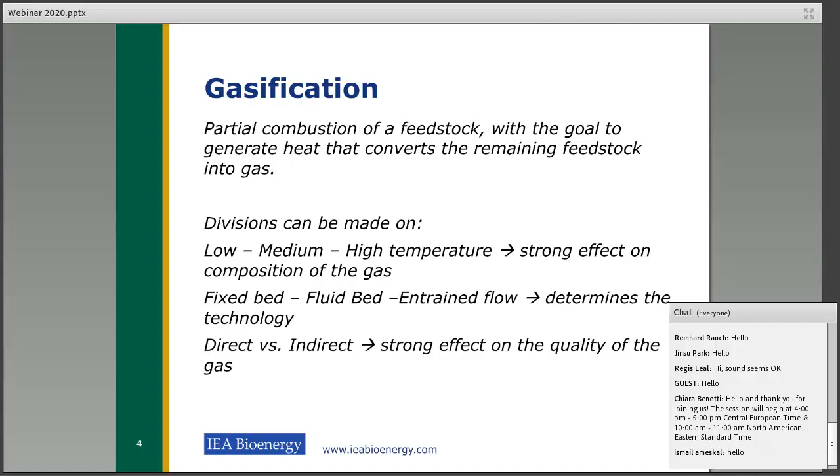And if you use air, it's further diluted from the nitrogen. An indirect gasifier has no dilution with this nitrogen or CO2, so you get a more rich gas, which has other applications. That will also become apparent, I hope, from the presentation.

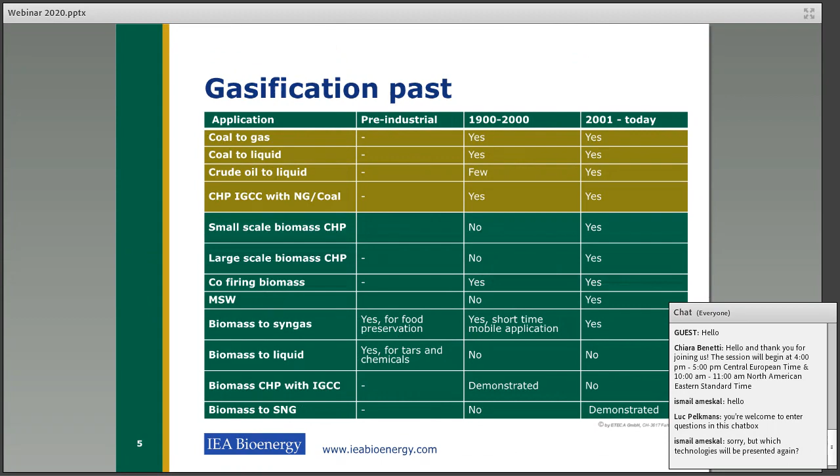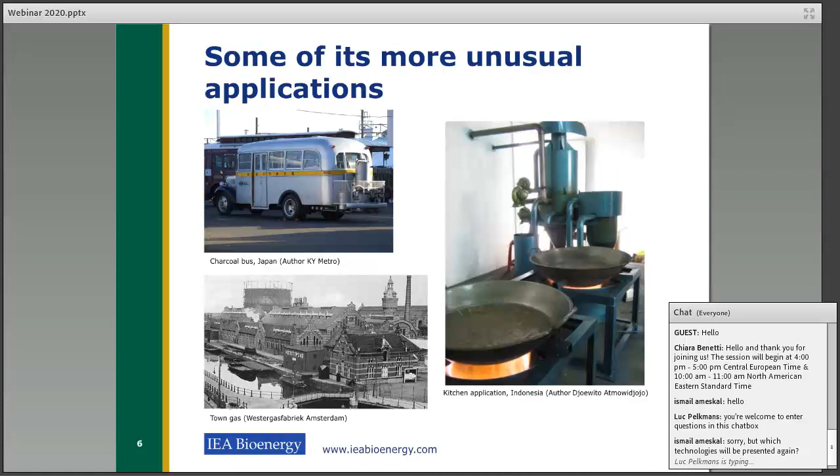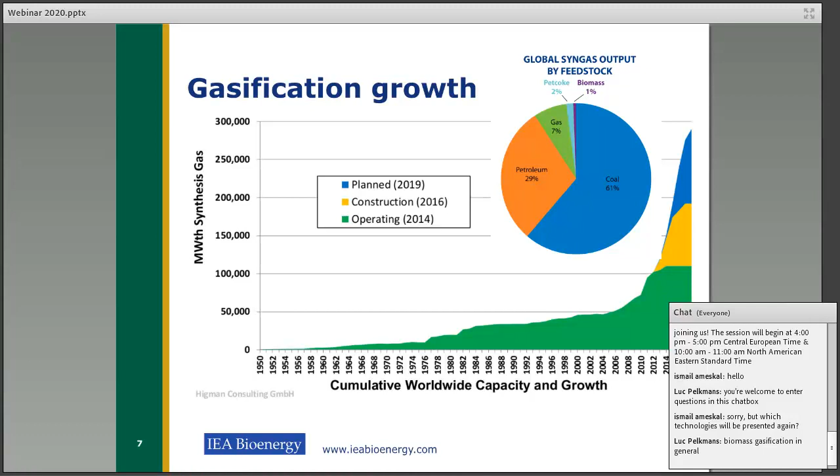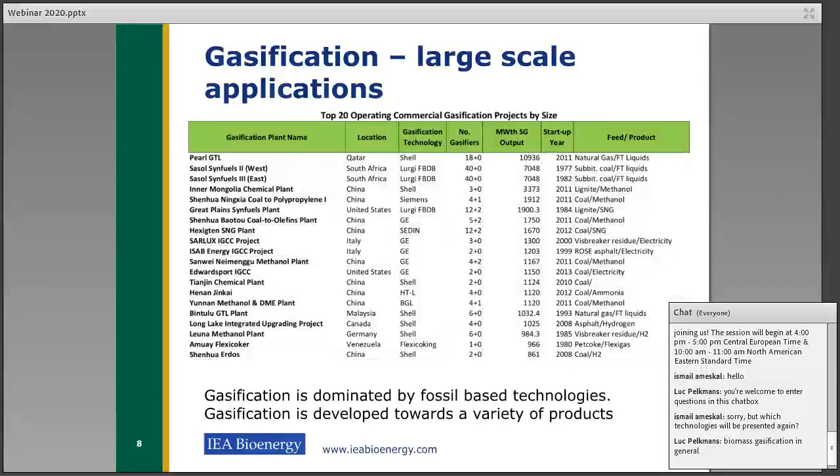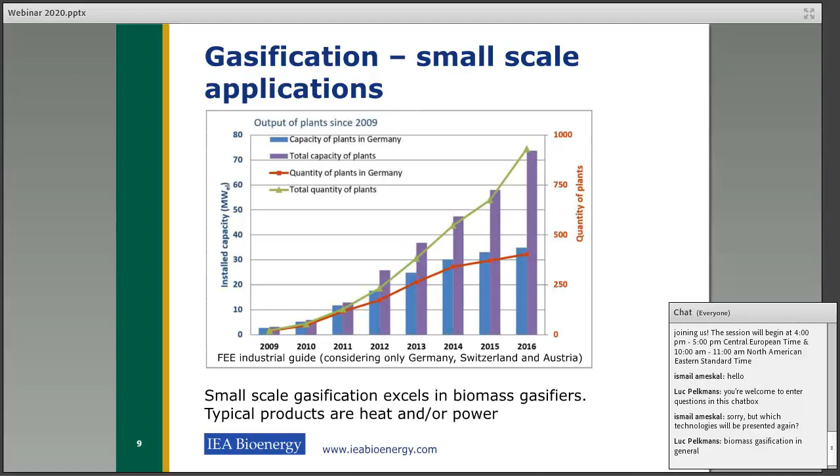Then if you go to more small-scale applications, the picture is completely different. The output or installed capacity is rather limited. This picture shows the installed capacity only in Germany, Switzerland, and Austria. But the interesting thing here is that the number of plants actually is quite large. You see close to 1,000 plants in total, and more than 400, I would say, in Germany. This is all small CHP applications, but it's all gasifiers that are in operation. So on a small scale, it's all proven and ready to go. It's also a good message to take home.

Then the following example is based on fossil fuel. I was reading on the Dakota Gas website about the history, and I found it very interesting. I think we can learn a lot about how things went there. In 1972, the decision was made to build this large coal gasification flagship, coal to SNG, substitute or synthetic natural gas. But it still took 8 years before they finally started construction. In the meantime, there were several occasions where the plant nearly got shut down, or the project never started, because of inflation, legislation, politics, governments that changed, offtake contracts that were not in place or not the right prices, falling energy prices, emission limits. So there's many things that can make or break a project, but eventually they started in 1980, and in 1984 they got online for the first time.

But still in 1985 they nearly had to abandon the project again because they were not making money, and the forecast was that they would lose a lot of money before they actually started making money, and then the DOE took ownership. In 1988, Basin Electric obtained the ownership for this plant, and they formed the Dakota Gasification Company. So that's 16 years later, where you actually have a company that is still running this plant today. But that's how much time it takes before it can be called a success.

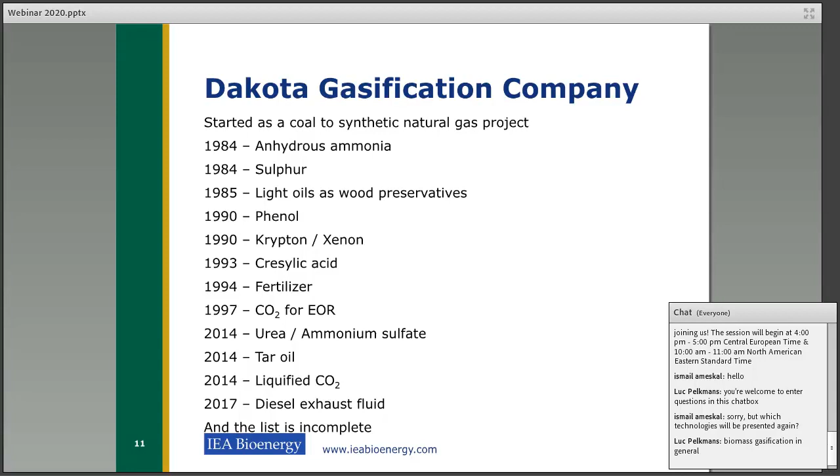Then if you look into what they were set out to make, the synthetic natural gas, to become independent from external energy suppliers. In 1984, they started up the plant, and they also started producing anhydrous ammonia and sulfur. You can see the list over the years - they added different products like light oils and phenol, krypton, xenon, and cresylic acid, fertilizer, until 2017, just 3 years ago, diesel exhaust fuel fluid as a product from this plant, in order to improve the business case. So it's interesting to see that a plant that started as a gasification plant for SNG production over the years develops more or less into a big refinery plant.

So what can we learn from this is that, well, gasification has been around for centuries. I think it's not a new technology in that sense. And it also has been successfully applied for different feedstocks, and also to produce different kinds of products. Some were temporary because of, well, wartime, but some of them are still out there today. And the early applications, I found that even more interesting, were actually high-value products. The chemicals and the food preservatives today would be a high-end product.

It's also good to notice that the percentage of installed capacity for biomass gasification is small compared to fossil. That's not a big surprise, but the number is quite large. Only for the 3 countries mentioned, it's close to 1,000, and then there's even more in India and China. So the numbers are quite large.

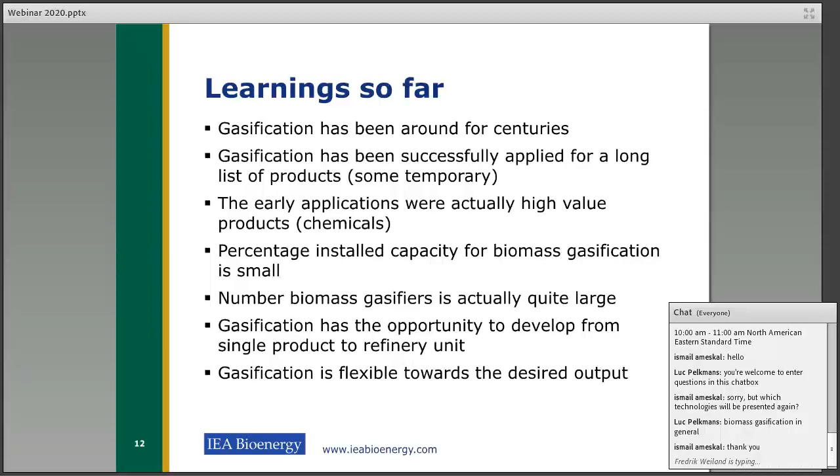Gasification also shows the opportunity to develop from one single product to more like a refinery approach. Maybe not for all gasification technologies, but at least for some technologies. And it's also flexible towards the desired output. So if you produce a gas containing energy in the form of CO and hydrogen, you can choose to go to a boiler or to an engine, but you can also try to develop projects towards biofuels or towards chemicals. So it's very diverse.

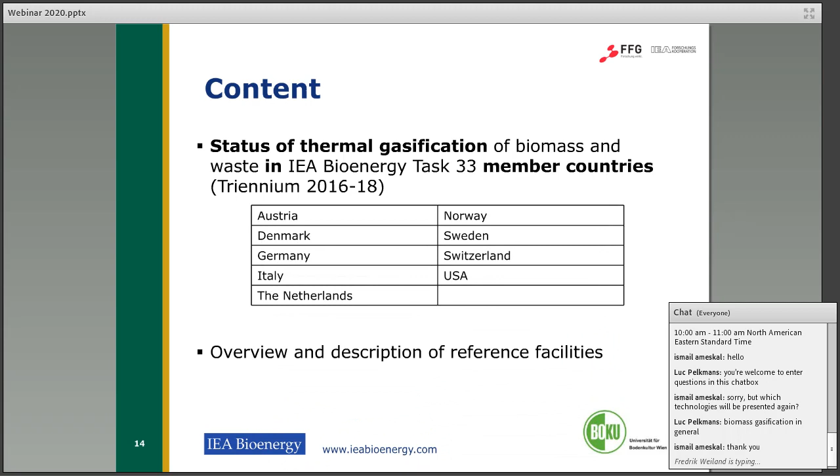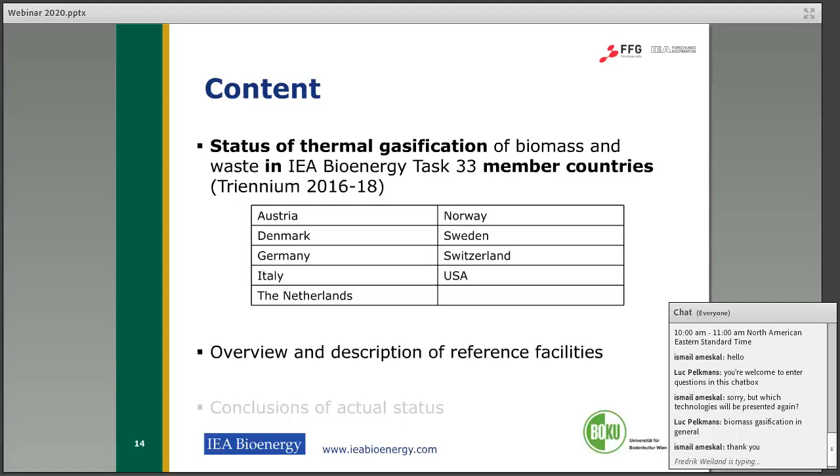The content of my presentation: at the beginning I would like to say some words about the status of thermal gasification. Then I would like to talk about the countries which were member countries of our task in the last triennium, followed by an overview and description of some reference facilities.

In Austria, at the moment, in comparison with the past, there is a boom of small-scale gasification facilities. We have 5 producers of small-scale facilities: Urbas, Syncraft, Glock, Ecoenergie, Hargassner, and Fröling. All these facilities are fixed bed. Syncraft alone produces floating fixed bed gasifiers and also focuses on biochar production.

Contrary to this boom in small-scale gasification, all large-scale facilities in Austria are now on hold. For example, Güssing: construction of this demonstration plant started already in July 2000, and it was in operation from November 2001 to October 2016. With this demonstration plant, the scale-up of fast internal circulating fluidized bed gasification process was realized for the first time. Therefore, the plant in Güssing can be seen as a reference plant for other facilities based on this technology.

These plants are in Germany, in Senden; in Sweden, in Göteborg; and in France. It is a Gaya project.

At that time, when Güssing was operational, due to favorable characteristics of the product gas, there were several research projects ongoing, using a slipstream. The focus of the projects was on production of Fischer-Tropsch diesel, production of SNG. It was also a topic for solid oxide fuel cells from the gas, and catalytic cracking of the tar.

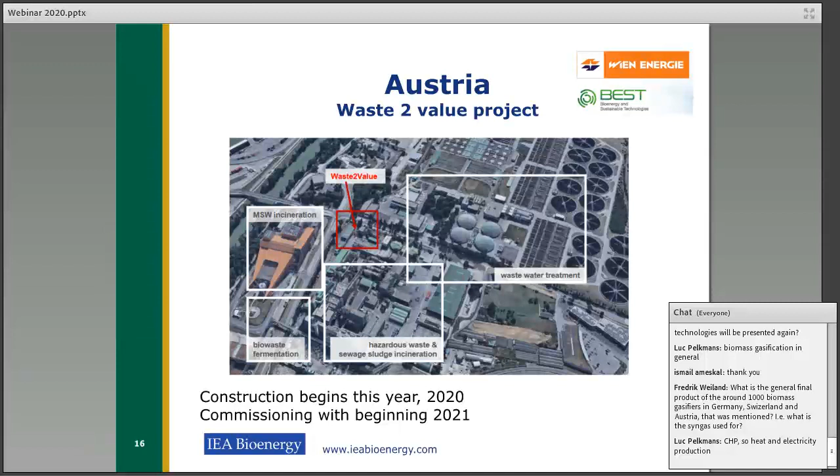It should be a 1 megawatt double fluidized bed gasifier with a 300 kilowatt Fischer-Tropsch synthesis pilot plant. It will be built near Vienna in Simmeringer Heide, and a research lab will also be included. Here the focus will be on mixed alcohols and hydrogen separation.

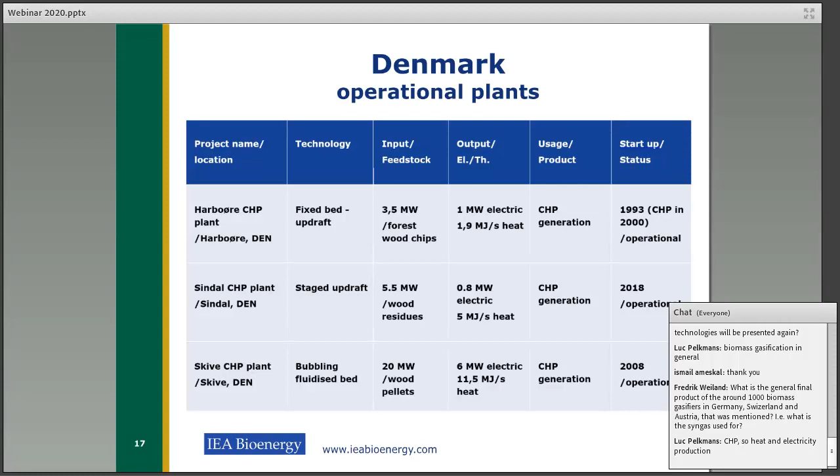The next country I would like to present today is Denmark. At the moment, there are 3 big plants in operation: one in Harboøre, one in Sindal, and one in Skive. All these facilities focus on combined heat and power production. The fixed bed is in Harboøre, the stage updraft is in Sindal, and the bubbling fluidized bed is in Skive.

I would like to say some words about the Skive plant. Commissioning started already in 2007 using just 1 gas engine, and operation began in summer 2008. After that, 3 further gas engines were installed.

As you can see in the picture, it is a bubbling fluidized gasifier with woody biomass input of 20 megawatts as feedstock. It has 3 engines now and produces more than 11 megawatts of heat. It produces district heating, and electricity is sold to the grid.

It should also be mentioned that public funding came from the Danish Energy Agency, the European Commission, and the US Department of Energy. After several years of intermittent operation, the plant has now reached high availability. Skive Fjernvarme, who is the owner of the plant, has been looking into the opportunity to utilize the gas not just for heat and power production, but also for the production of gasoline and other products.

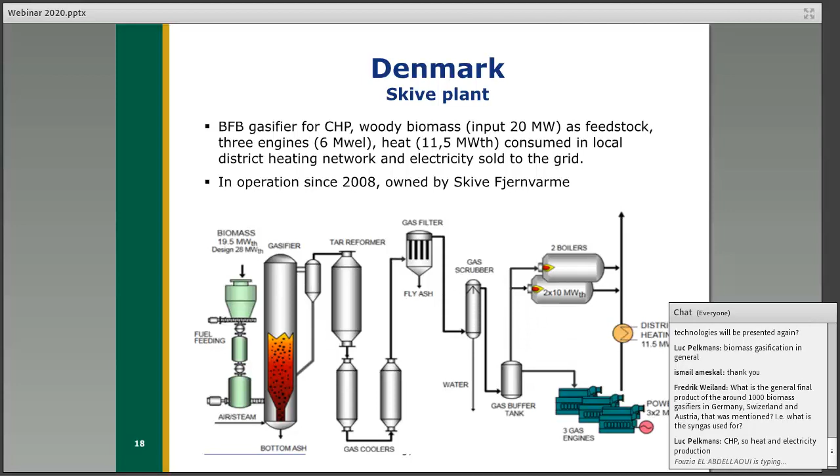The next slide is about 3 plants which are not already in operation: a Pyroneer plant, the Viking gasifier, and a plant in Hillerød. All 3 plants are now on hold or mothballed. The Pyroneer plant was a circulating fluidized bed gasifier with 6 megawatts thermal.

Commissioning was in 2011, and feedstock was straw and manure fibers. The gas was co-fired in a coal-fired unit, and it was planned to upscale up to 60 megawatts thermal, but this technology was not as successful as supposed, and it was not sold. In 2015 it was mothballed, and now it is a research facility at DTU.

The Viking gasifier is a stage gasifier with 500 kilowatts electric, used for district heating. It was in operation just a few times, and it was dismantled in 2016. But this plant, like the Pyroneer plant, is still a research plant at DTU.

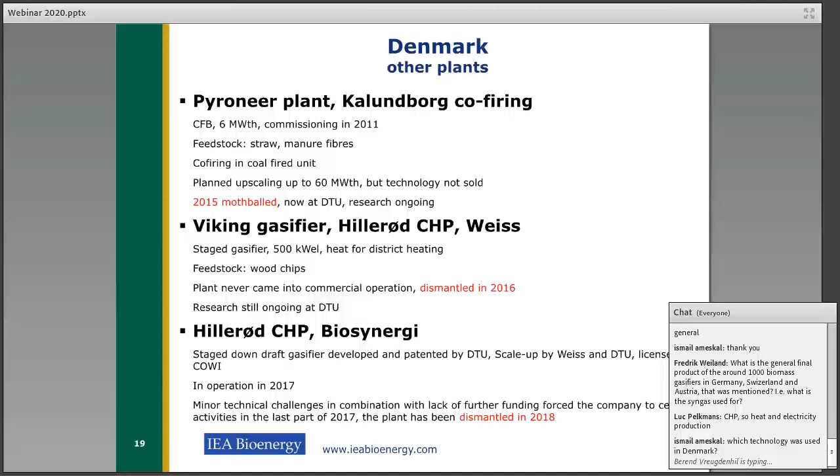The third plant is a stage-downdraft gasifier, which was developed and patented by DTU. This too is now dismantled, which happened in 2018. In Germany, the situation is such that I would like to, at the beginning, talk about large-scale facilities and then come to smaller ones.

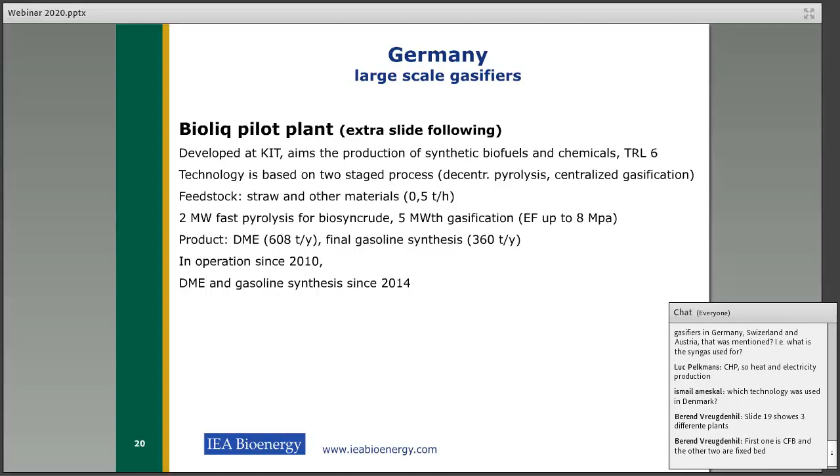Bioliq pilot plant - I think most of you know Bioliq already. It is a decentralized part where fast pyrolysis takes place, and the biomass, mostly straw, is processed to biosyncrude. This biosyncrude is then, in a centralized part, gasified with an entrained flow gasifier. After gas filtration, cleaning and conditioning, DME and gasoline type products are produced.

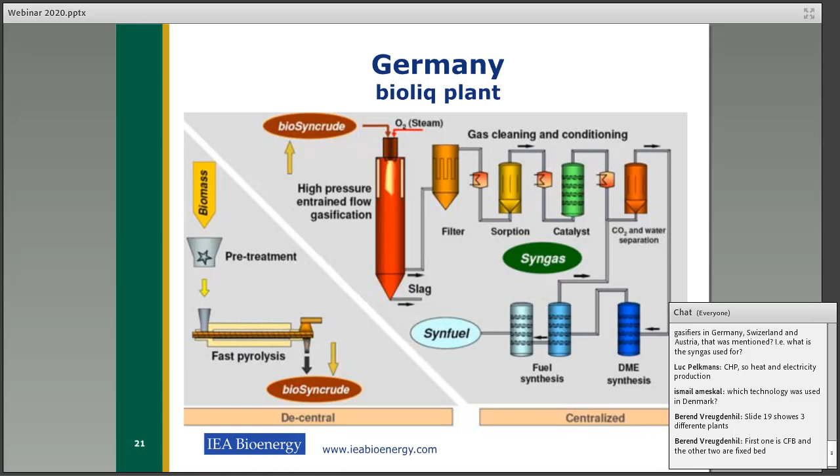The product is DME, about 608 tons per year. The plant has been in operation since 2010, and DME and gasoline synthesis since 2014. The plant is technical readiness level 6, and they use it for research. They run mostly 1 or 2 campaigns per year testing different types of fuels, and the results can be found on our website, which I can show you later.

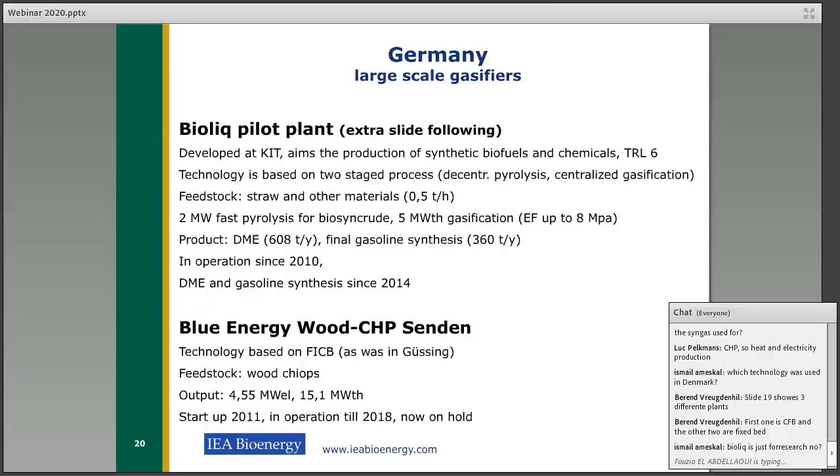The second one is Blue Energy Wood in Senden. This plant is now on hold. It was operational until 2018, run by the Senden company, and was then bought by Blue Energy Wood, but operation was not continued. It was complicated, and from a commercial point of view it was not really possible to operate further, so now the plant is on hold.

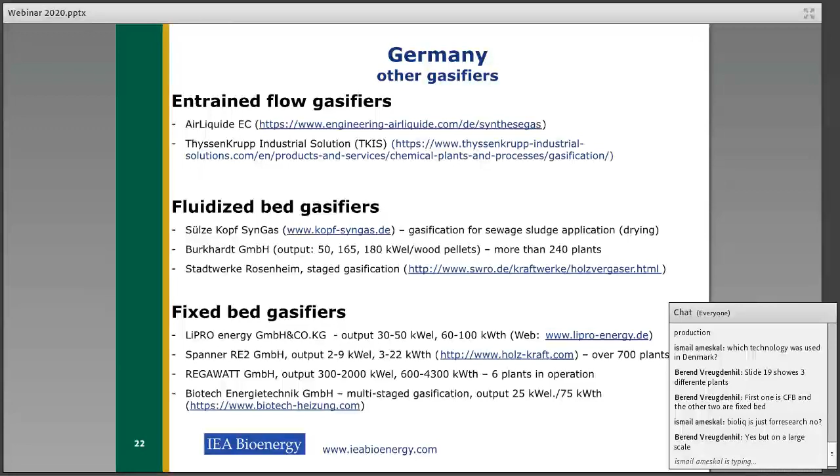Regarding other gasifiers in Germany, there are also entrained flow gasifier producers, fluidized bed gasifiers, and fixed bed gasifiers. As I already mentioned with the Bioliq project, Air Liquide entrained flow gasifiers was involved in that project. There is also ThyssenKrupp Industrial Solutions. For fluidized bed gasifiers there's Sülze Kopf, Burkhardt and Stadtwerke Rosenheim. And for fixed bed gasifiers, companies like Spanner, REGAWATT, Lipro, and also Biotech Energietechnik GmbH.

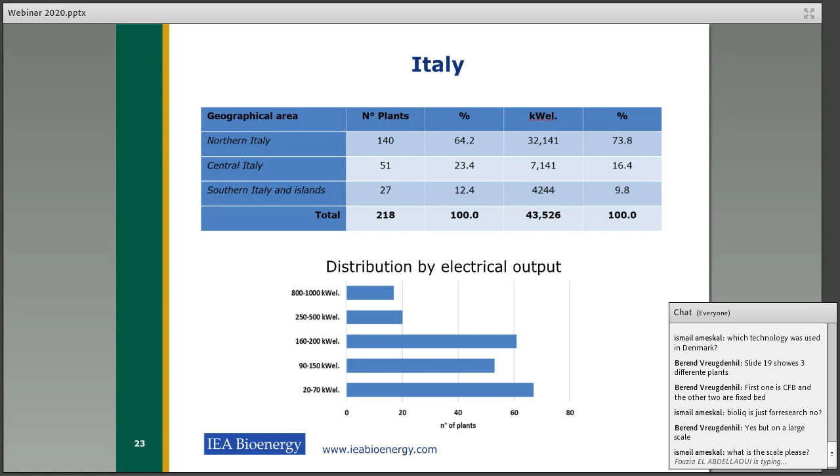In Italy, there is really a boom of small-scale gasification. As you can see in the table, there are currently more than 218 plants in operation, most situated in northern Italy, producing more than 43,000 kilowatt electric. Looking at plant size, the smallest are more than 60, about 70, so between 20 and 70 kilowatt electric. Just a few plants have an output of about 800 to 1,000 kilowatt electric. In Italy, there are currently 3 producers of small-scale gasifiers.

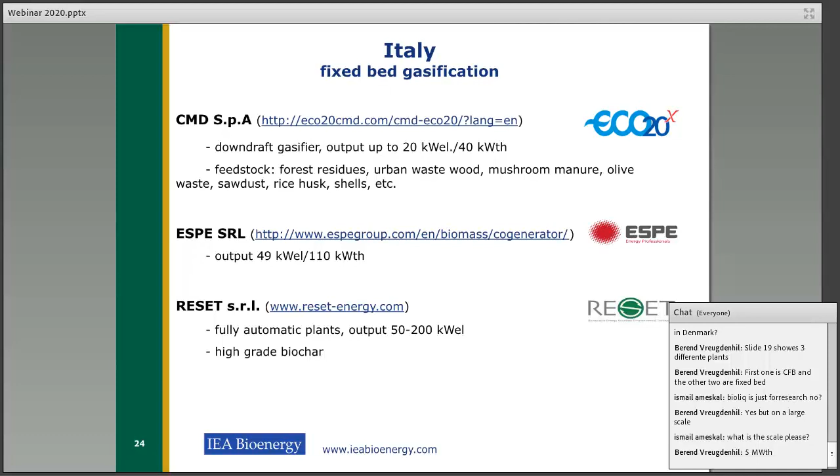CMD produces a downdraft gasifier with output about 20 kilowatt electric and 40 kilowatt thermal. ESPE also produces small-scale gasifiers with output of 49 kilowatt and 110 kilowatt thermal. And Reset produces fully automatic plants with output between 50 and 200 kilowatt electric. They also produce high-grade biochar, which they sell to the market.

In the Netherlands, I would like to talk about Bioenergy Netherlands. They produce modular plants for combined heat and power production, but in the future they would also like to focus on other products like biogas and hydrogen. Bioenergy Netherlands uses modular plants, and because of this modular structure they can focus on different applications. The gasification plants of Ben use biomass mainly in the form of residual wood.

In November 2017, construction of a wood gasification plant started in the Port of Amsterdam. The technology is supplied by Zero Point Cleantech, which is fixed bed technology. The first phase was expected to be operational in May last year, so it should be in operation by now. There is also a collaboration with Jenbacher, the gas engine producer, and the plant in Amsterdam is designed for a total of 15 megawatt hours of combined heat and power.

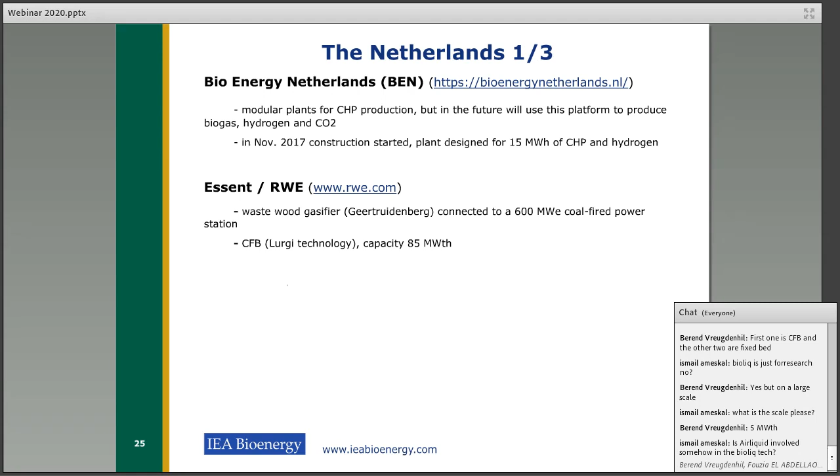Essent owns and operates a waste wood gasifier connected to a 600 megawatt coal-fired power station. The plant is situated in Geertruidenberg and is called AMER 9. The coal plant co-fires biomass in two different ways: approximately 25% of energy from clean wood pellets is directly co-fired, and another 5% is indirectly co-fired through a gasifier. The gasifier was built in 2000-2001 and underwent several hardware modifications related to fuel feeding and gas cooling and cleaning. The capacity of the gasifier amounts to 85 megawatt thermal, and it is a near-atmospheric circulating fluidized bed reactor based on Lurgi technology.

ESKA is the leading global manufacturer of recovered paper-based substrates for a wide variety of industrial applications, including hardcover books, luxury packaging, puzzles, and so on. I think you know ESKA already. ESKA uses gasification to replace natural gas.

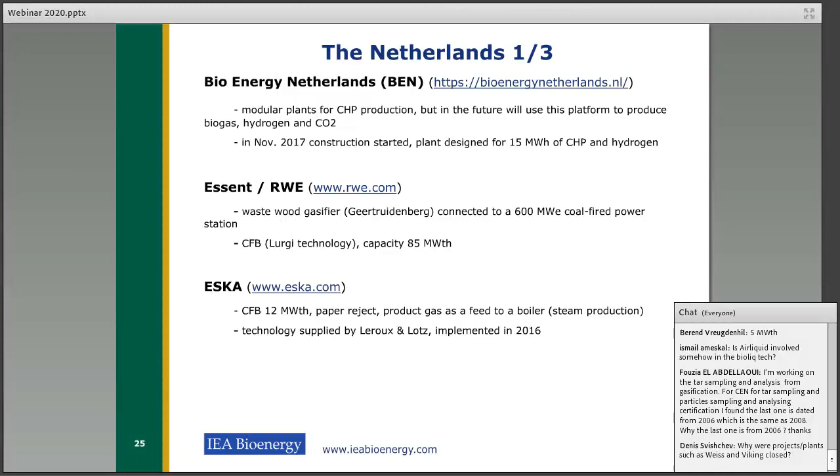ESKA uses circulating fluidized bed technology to gasify paper rejects, using the product gas as a feed to a boiler. The technology was implemented in 2016, and the installation is a 12 megawatt thermal circulating fluidized bed boiler processing 25 kiloton per year of reject to produce steam for on-site processes. The plant started operation in 2016.

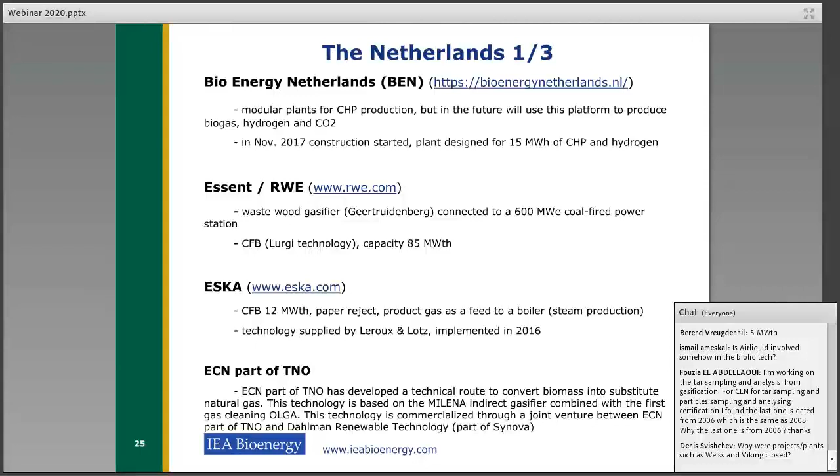Also ECN, which is part of TNO, this is a company of Berend. ECN has developed a technical route to convert biomass. This technology is based on the Milena indirect gasifier combined with the Olga gas cleaning system. Maybe Berend can say a few more words about that.

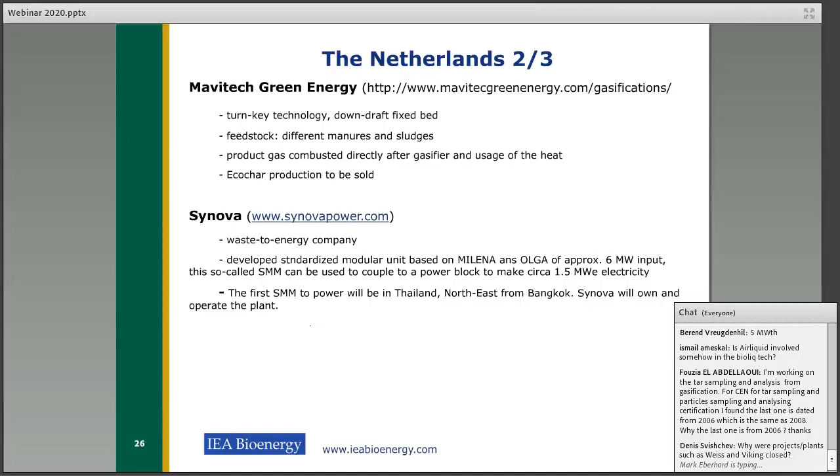Synova is a new Dutch company. They are a company in the field of waste to energy. They develop a standardized, modularized unit-based system based on Milena and Olga, as I already talked about. And they are planning to build a plant in Thailand.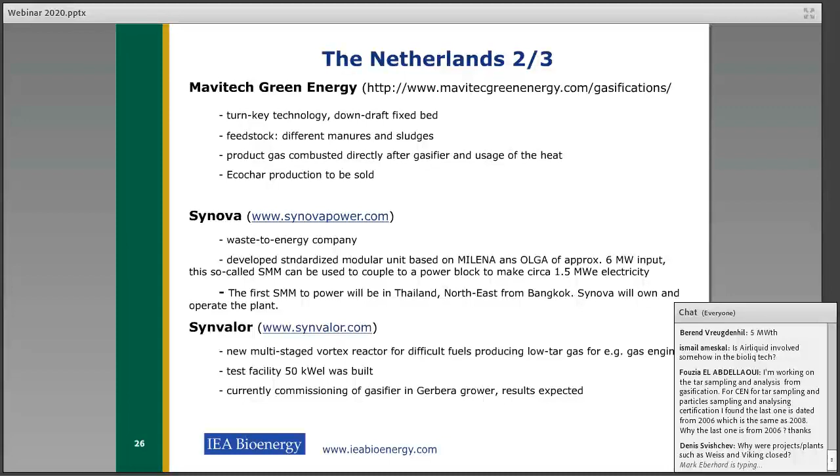Currently, they are commissioning a gasifier for Gerbera grower, and results are expected.

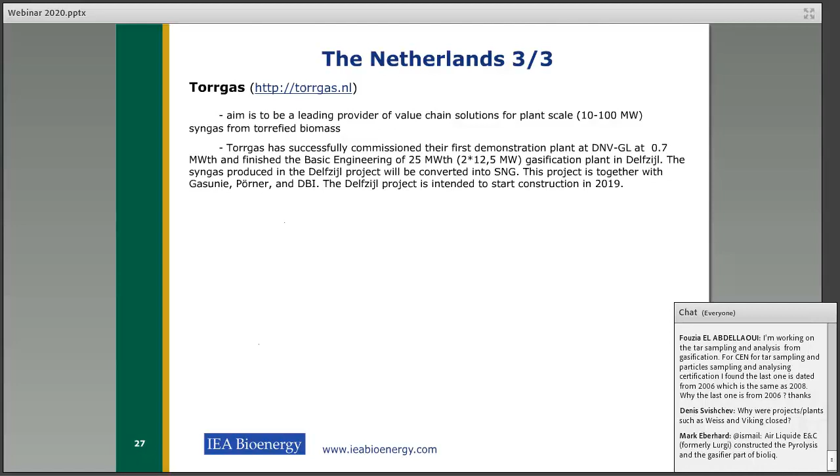Torrgas is a company which was founded in 2012 and specializes in the development of biomass-to-energy and biomass-to-chemicals projects. The objective of Torrgas is to develop and technically and commercially prove the operation of a biomass gasification process to produce chemically graded syngas, free of nitrogen and tar. With these boundary conditions, they would like a process which is scalable, financially feasible, easy to operate, and of course reliable.

The next one is SCW. It's a young company focusing on supercritical water gasification.

Their first demonstration plant was constructed in Alkmaar and started in the second half of 2018. This technology is different from the others I already described, since it goes to very high pressure and high temperature. Typical operating conditions are more than 220 bar and high temperature. Under these conditions, water changes into a supercritical phase, salt will crystallize, and organic materials will dissolve. This solid can be taken out of the supercritical phase, and the dissolved components can react to produce methane, hydrogen, and CO.

The expertise of Host focuses on the technological development of the processing of biomass and waste streams, and the supply of systems for renewable energy from biomass and waste. Host now offers a range of technologies from anaerobic digestion and biogas upgrading to biomass combined heat and power plants and boilers. In their range, they also offer CFB gasification technology for boiler applications.

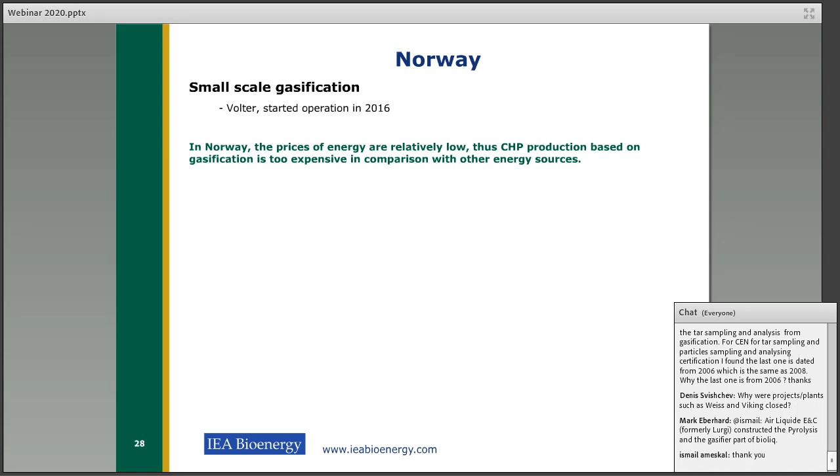Anyway, two projects should be mentioned here. Quantafuel is a plant located in Skive, in Denmark. It is a Norwegian project, and this plant focuses on conversion of plastics from local suppliers to produce local, environmentally friendly, high-quality fuel.

They would like to convert approximately 18,000 tons of plastic per year, with an output of more than 15 million of high-quality recycled fuels. The second project is Biofuel, which focuses on sustainable economic production of aviation biofuels from household waste.

And the projects in Sweden. In Sweden, there are not really small-scale gasifiers. There is just one of them, in a dairy. It is the only example and has an output of 40 kilowatt electric and 100 thermal.

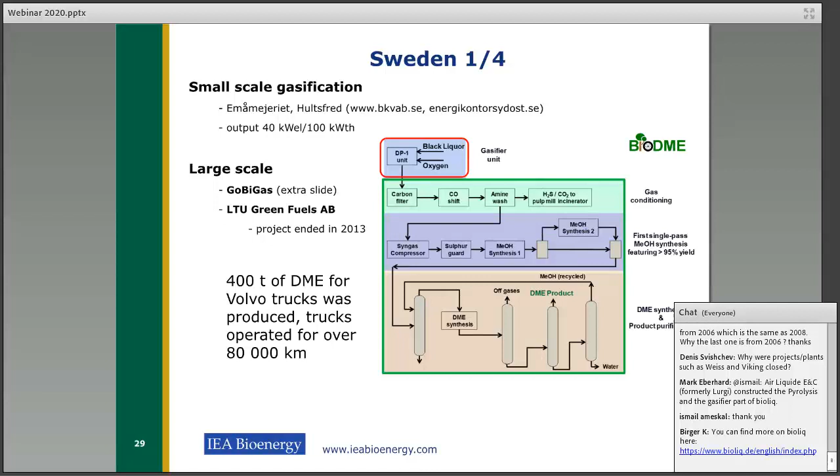And now about large scale, I would like to talk about the GoBiGas project and also LTU Green Fuels AB. GoBiGas I have on a separate slide.

It should be said that the GoBiGas was planned as a two-phase project. The Gothenburg Biomass Gasification project has been Gothenburg Energy's largest investment in biogas production and the first investment outside of conventional biogas production plants. The aim of the project was to supplement conventional biogas production through gasification of solid biofuels and forestry waste.

They reviewed the technology, and after revision of the technology, the status showed that at the moment there was no similar plant operating on this technology which was validated at large scale. That was the reason why the project was split into two phases to reduce the technical risks.

The first demonstration plant was 20 megawatt product gas, and it should be followed by the second phase of 80 to 100 megawatt of SNG, of biomethane.

However, it should be pointed out that the first phase is not operational at the moment, but it was also never intended as a self-sustaining project. It was only in the context of also going forward on phase 2 to reach 100 megawatt gas. Official startup of the first phase was in October 2013, and the plant was in operation till May 2018. They had more than 1,800 operation hours.

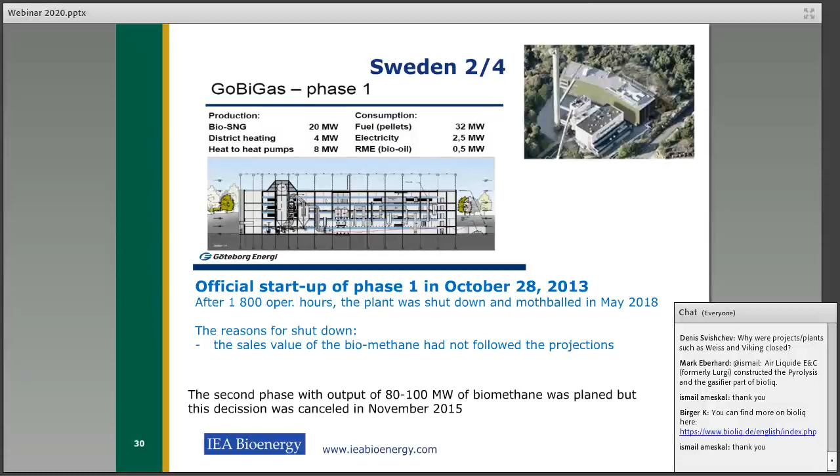The next project I would like to talk about is Cortus Energy. Cortus Energy is a company which develops the WoodRoll technology.

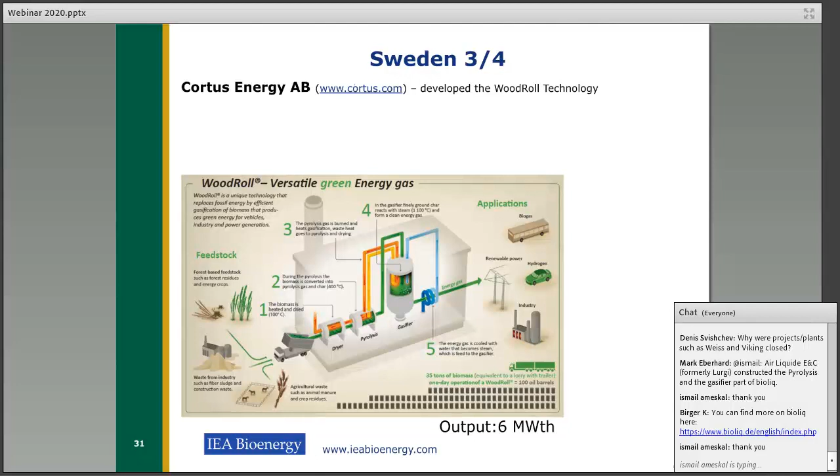What can you see on this slide? It is a staged technology. It integrates 3 stages: drying, pyrolysis, and gasification. It has been reported that the gasifier has been operating over 5,000 hours as of September 2018, and the dryer and pyrolyzer over 2,000 hours each.

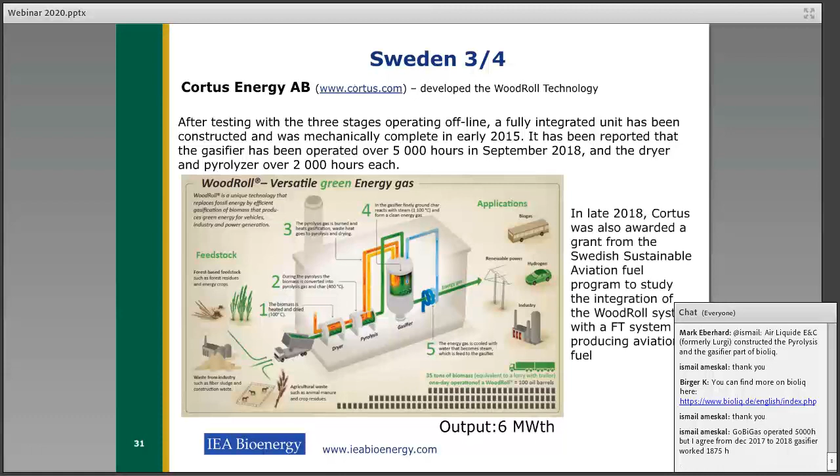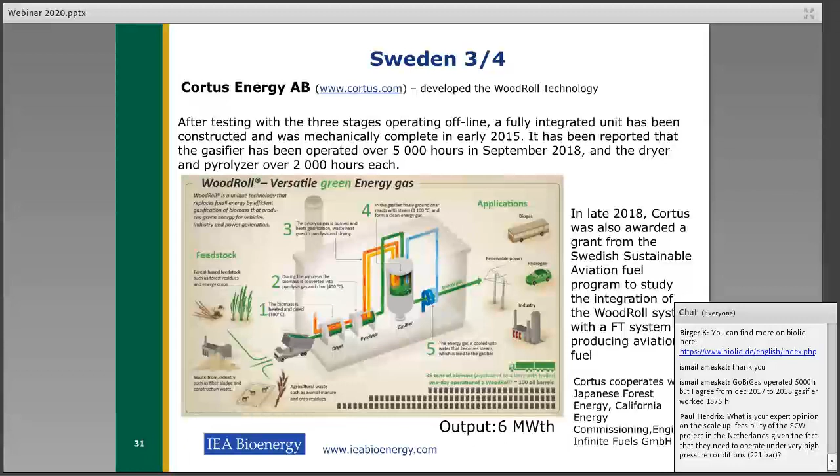In late 2018, Cortus was also awarded a grant from the Swedish Sustainable Aviation Fuel Program, and at the moment they cooperate also with Japan and other countries.

MEVA is the owner of VIPP technology, which originates from developments by LTU. A test unit was installed at ETC in Pitea, already in the 1990s. The purpose was to develop a small-scale combined heat and power system based on small-scale gas turbines.

But in 2008, MEVA Innovation changed its name to Meva Energy AB and acquired the rights for the cyclone gasification technology. The gasifier is fed with pulverized fuel, and the gasification agent is air. The cyclone is operated between 800 and 900 degrees.

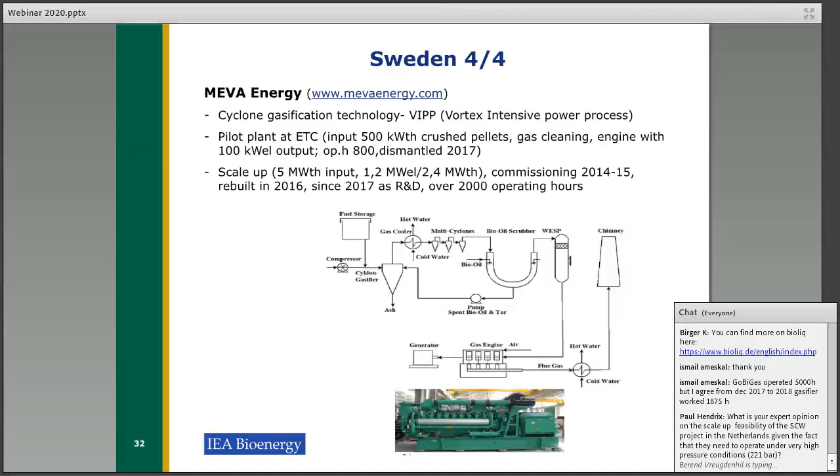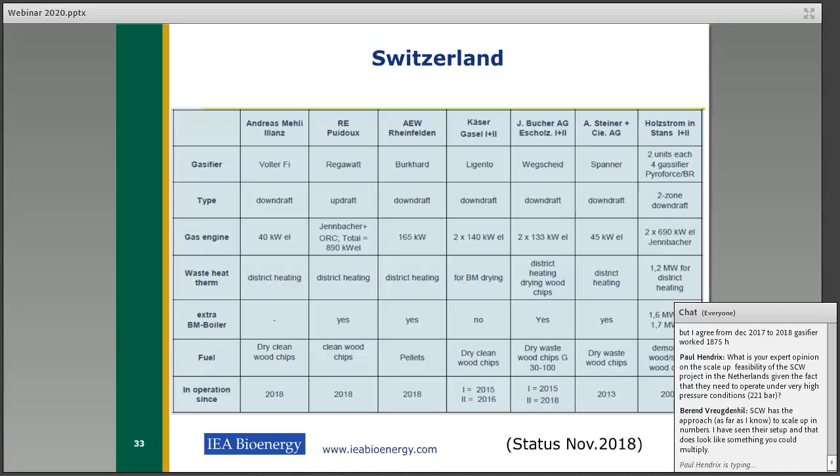They are aiming to produce combined heat and power, and also the heat is used for district heating. The last country I would like to talk about is USA. In the USA, I would like to mention 3 projects. It is necessary to say that in the USA there are almost no small-scale gasifiers at the moment, but they are focusing in the USA on aviation, biofuels, and liquid fuels from gasification overall.

I would start with Red Rock Biofuels. The feedstock of this process is a mixture of softwood and forestry waste materials and some pre-commercial thinnings. The feedstock will be obtained from non-federal land in southern Oregon and northern California. 70% of annual feedstock requirements is under long-term contracts, which is really good.

Conversion to biofuels is in this case a multi-step process involving feed receiving and processing, gasification and syngas cleanup, catalytic conversion to Fischer-Tropsch products, upgrading fuel, and fuel distribution. The biomass gasification technology is a steam reforming process, licensed from TCG Global, and syngas cleanup and conditioning, including the tar reformer, is designed by the company Fluor.

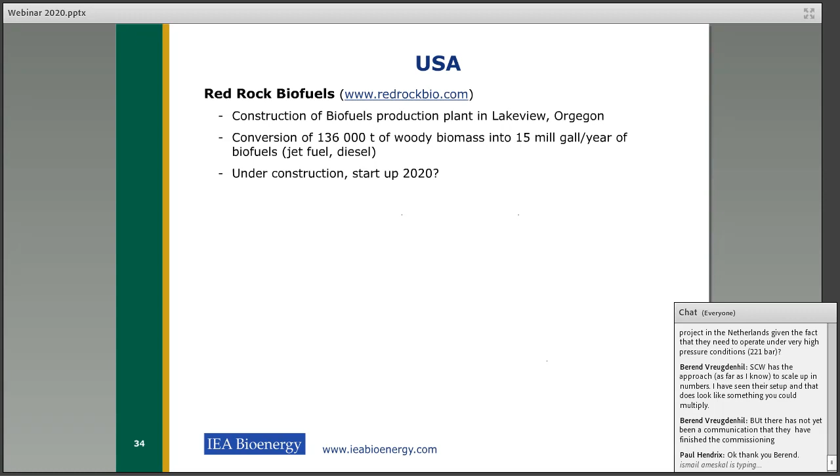Red Rock Biofuels broke ground on the Lakeview facility in July 2018, and the plant is currently under construction. Completion is expected in mid-2020, and operation should start maybe this year, but maybe also next year. It is not really clear.

The next one is LanzaTech. LanzaTech would like to build a new biofuels production facility which will produce about 60 million gallons per year of ethanol. The plant will be located in California, roughly about 150 kilometers from San Francisco.

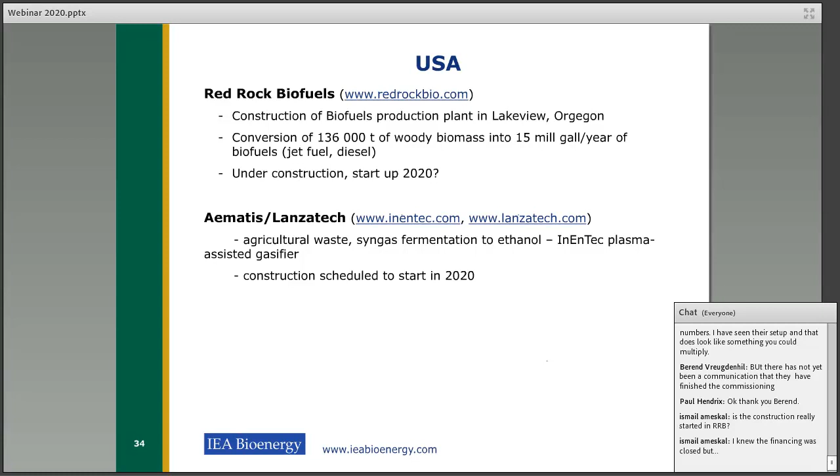Biomass should be converted to syngas through gasification using a plasma-enhanced melter technology, and syngas from the gasifier will be fed to LanzaTech's microbial fermentation technology to produce primarily ethanol. Construction is scheduled to start in 2020.

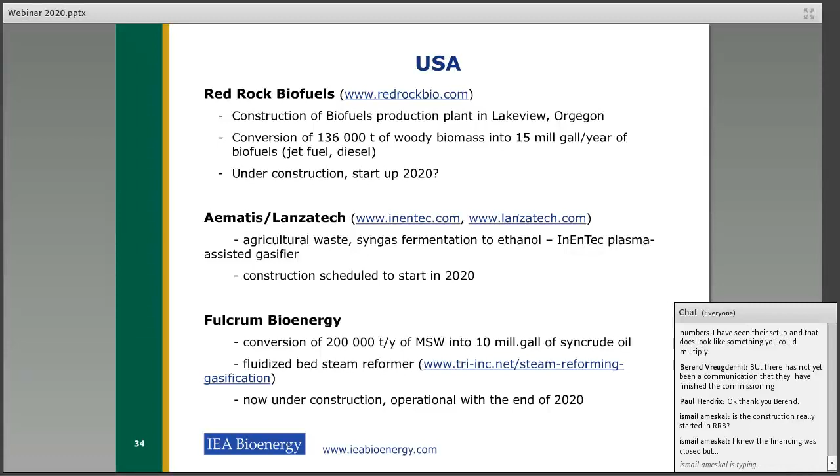And Fulcrum Bioenergy's Sierra Biofuels plant near Reno in Nevada should convert approximately 200,000 tons per year of municipal solid waste into 10 million gallons of renewable synthetic crude oil through feedstock preprocessing, gasification, and Fischer-Tropsch synthesis. The gasification technology is an indirectly heated fluidized bed steam reformer. There is a link if you need some more information.

More information, which I forgot to say today, you can find in this report. This report is based on information from our member country representatives and also on our database, which is a part of our site.

To summarize the current status, the boom of small-scale gasification for combined heat and power applications can be observed in Europe during the past five years. At the moment, we have more than 1,500 operational units, but in the database you are not able to find them all. We have just reference plants.

The second thing I would like to say is that large-scale gasification facilities are now mostly closed for economic reasons, not technical reasons. Feedstock for gasification is moving from clean wood, as it was in the past, to waste and other difficult materials.

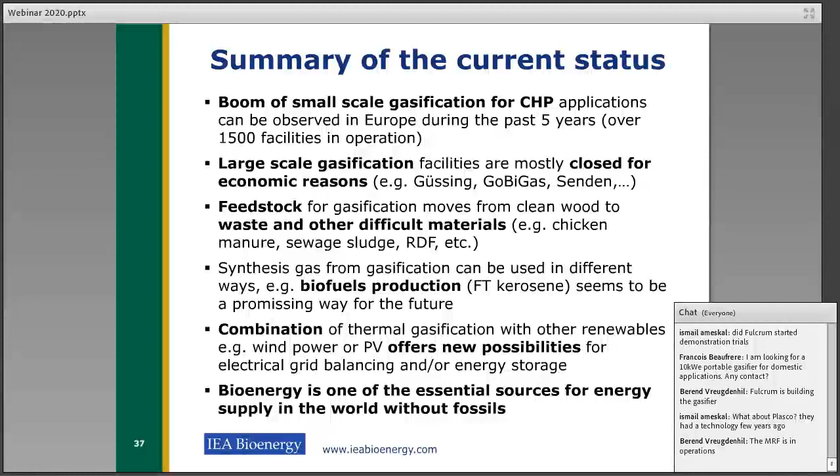I should point out that bioenergy is one of the essential sources for energy supply in our world without fossils. So, this is everything from my side for this presentation, and now Berend will take over.

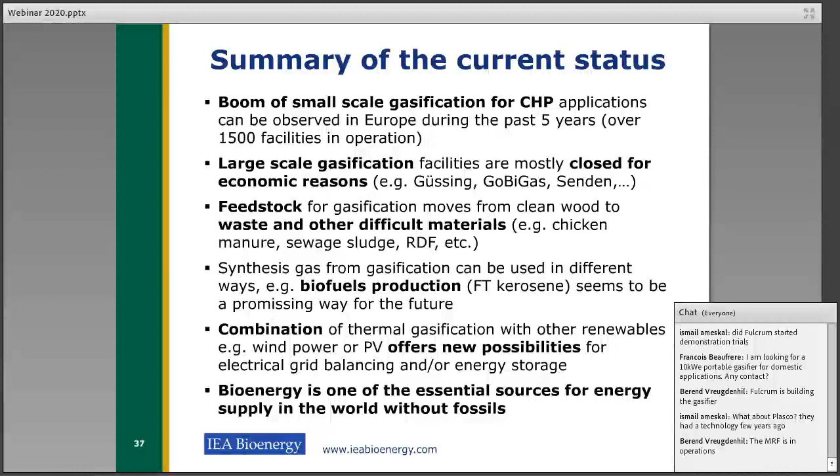Thank you, Jitka. Yes, the future of gasification will be slightly more difficult to predict, but still it's nice to think about it. If you look into some of the strategic research and innovation agendas, for instance by ERA or IEA Bioenergy, you see that bioenergy in general, but also the role of gasification, is underpinned by their reports. It's important in order to reach the goals set out by the EU.

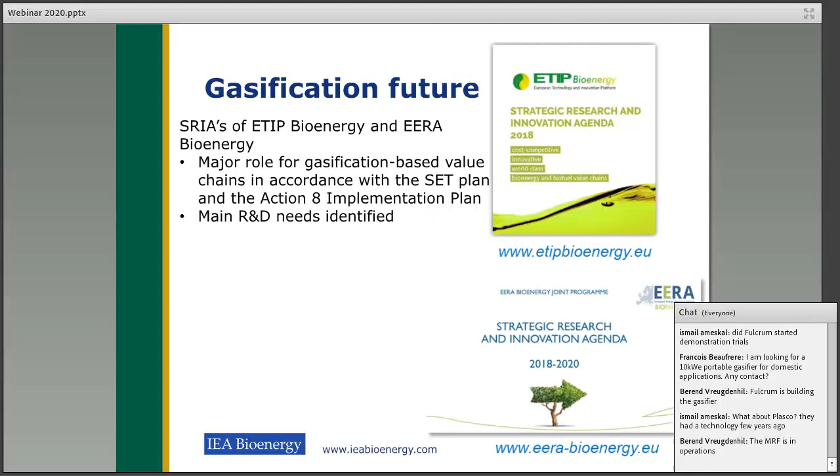And I think that with the Green Deal that Ursula von der Leyen has signed for the EU, especially advanced biofuels will become very necessary in order to meet our targets, and gasification will be one of the key technologies. So the future is in this area, but there are more developments on their way.

There have been some reports in the last triennium of the IEA Task 33 on how gasification could be used for the gasification of waste for energy carriers, but also implementing CCS or bio-CCS in biofuel production, or producing hydrogen from biomass gasification. What you see is that, for instance, in waste management, typically in Western Europe, most of it is incinerated.

In Eastern Europe, there's more going into landfill, and in, for instance, Asian countries or developing countries, even more is going into landfill or ending up in the ocean. Gasification offers the possibility not only to produce heat and power from the feedstock, but also to develop routes where you work on recovery of chemicals, the building blocks of the original plastics.

Biofuel production with CCS is an important one because that actually helps you reach negative CO2 emissions. You do need places to store the CO2 in that case, but this, for instance, is already being done with enhanced oil recovery, like the Dakota plant is doing.

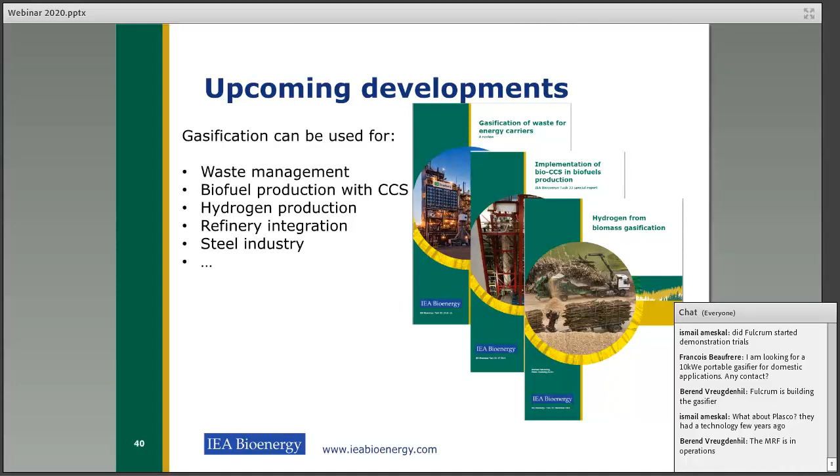Two other topics for which I prepared some slides are refinery integration and the steel industry, where gasification can also play an important role in becoming CO2 neutral or more bio-based. If you look into refinery application, Chalmers University made a nice overview last year on how a refinery could become more sustainable.

At TNO, we've looked into gasification of more plastic-containing waste streams. What I plotted here is the gas composition of a typical biomass gasification test, and what you can see is that your main components on a volume basis are hydrogen, CO, and CO2.

Over 75% is these molecules, and then hydrocarbons is the remaining 25%. Whereas if you start gasifying waste streams, plastic waste streams, you see that the amount of hydrogen, CO, and CO2 becomes less than 25 on a volume basis, and on a mass or energy balance it's even smaller. And you start to produce methane, ethylene, propylene, benzene, and this gas composition actually starts to resemble the outlet of a naphtha cracker.

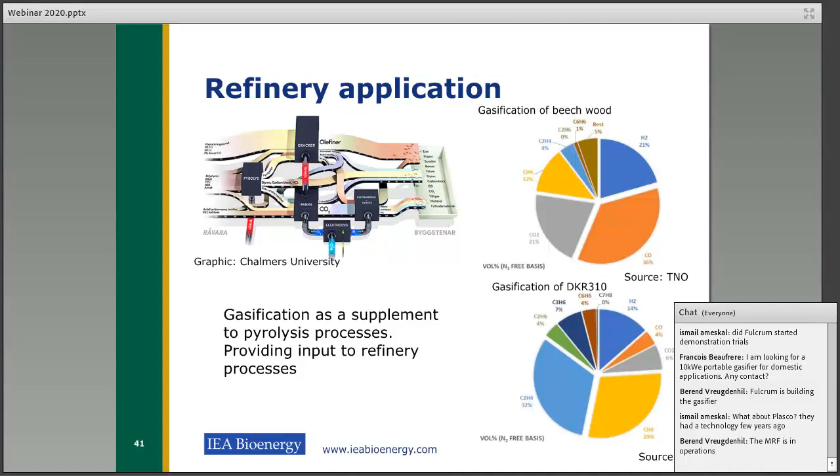So there you see that gasification is a technology that can unlock a huge potential of waste streams and start working on what's called the circular economy.

Then if you look into the steel industry, it was mentioned before, the Cortus Woodroll technology. What is happening in Sweden there at Höganäs AB, they erected a gasifier 14 meters high, and that's used to produce a gas from forest residues, replacing natural gas in the steel process. And there you just have the gas coming out of the gasifier, containing CO, hydrogen, CO2, but you could also work towards producing hydrogen from this gas and use hydrogen directly in your steel making process.

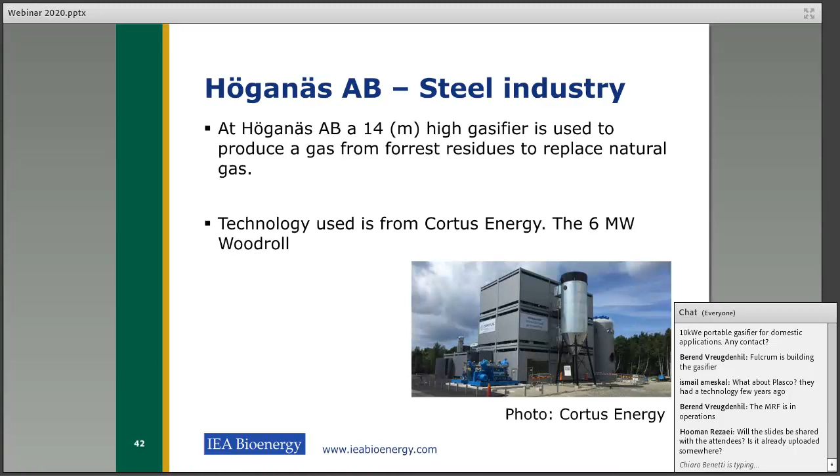So there's several applications for a gasifier to be used in this industry, and there are other industries which are also very energy intensive and relying heavily on fossil fuels, where gasification can play an important role. And that's also with the current realization that our environment is not heading in the right direction. The options for gasification are becoming increasingly interesting.

So how will this develop? I think that first the biggest development will be gasification of biomass to produce biofuels. There are several examples. I just put a few here, also to highlight different technologies and different outputs.

The BioTFuel project in France is using entrained flow gasification, high temperature, producing Fischer-Tropsch and making from that aviation fuel or diesel.

Engie has a development ongoing in France also, where they go for renewable natural gas or substitute natural gas using a dual fluidized bed gasifier. Sungas Renewables from the US is a spin out of GTI, and they focus on producing renewable natural gas. And Enerkem is looking more into waste gasification, so that's a mix of biomass and plastic, household waste, and converting that into methanol in a bubbling fluidized bed.

So it's different gasification technologies, different biofuels, and these developments are ongoing, and it's not the only developments that are ongoing, but this is really happening, I think, because of the changing perception on where should our fuels come from.

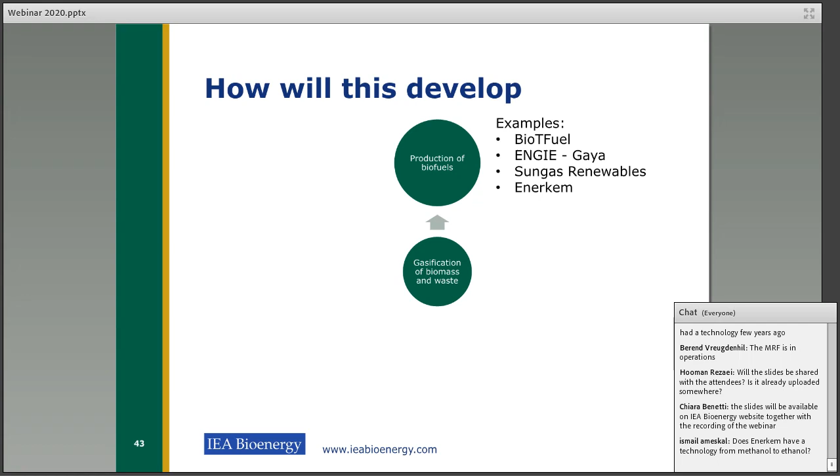Replacing fossil fuels in industry, that was the other option, is replacing natural gas as a heat source with a biogas. Producing hydrogen, I think that's an interesting one, and there is an example I found on the internet. There's not so much available on that, but it's RWE using Furec technology to produce hydrogen.

That's what you find on the internet. But again, gasification technology to produce an energy source.

Then, well, what I find a very interesting one is the link between waste which contains plastic and use that in a gasifier to make new building blocks for plastic. So basically cracking this feedstock into a gas that can be used to make new plastics.

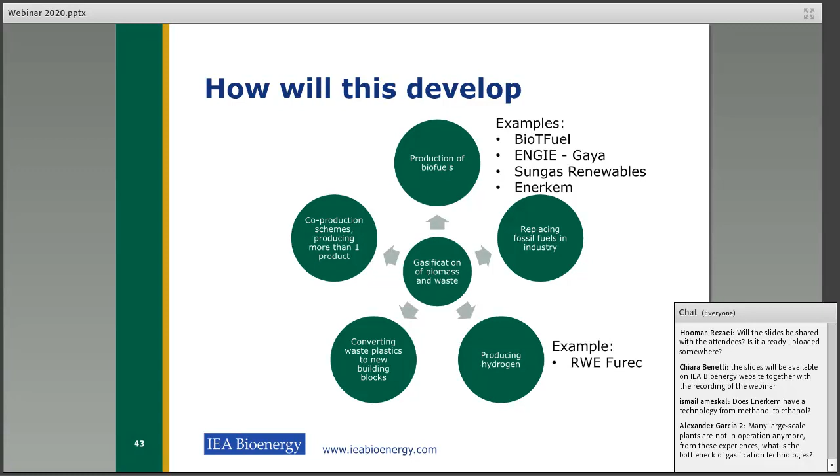That's a development that you see, so in the refinery applications, and also co-production schemes. So companies are not focusing on one product anymore. They are looking into ways of producing more.

And there's some examples like Mavitec and Torrgas. They have a co-product, and Syncraft as well, where they can co-produce biochar, which is helping also to make the business case work. And Synova, they have the opportunity to produce BTX from the gas before they use it in an engine. So it's not one product anymore. It's more, and you do that in order to improve the business case.

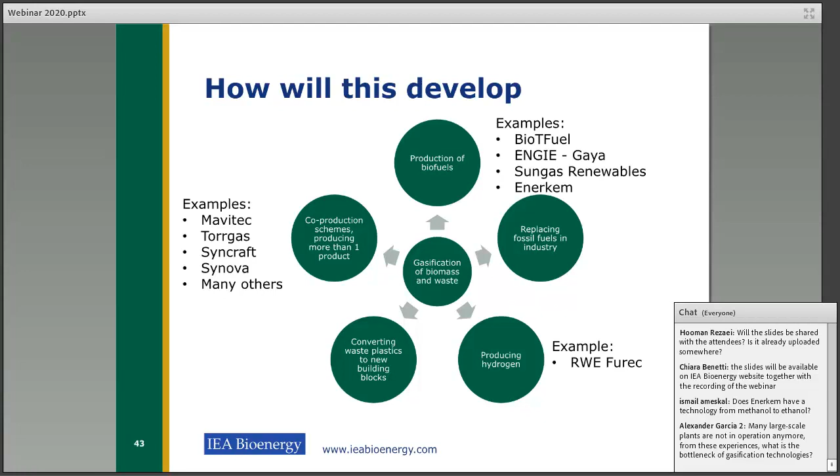And I think these are the ways where gasification will start to play an important role, and I think the biofuels route will be one of the biggest developments in the ongoing years. So the conclusion that I would like to make is that the biggest possibility, in my opinion, is for biofuels, and not to grow in numbers like with CHP, but actually to achieve growth in scale.

Co-production, I think, is very important in developing sound business cases. I like the Dakota Gasification Company example, where you see that this is a natural process. Not every gasification technology is suitable for this, but when your technology is, then it's something to keep in mind.

Gasification holds the key in unlocking the combination of the bio-based economy and a circular economy, because in a future energy system where fossil fuels are phased out and waste streams are reused more and more, there will always be a loss. And if you want to avoid supplementing the loss with fossil fuel, you will have to look into biomass. Gasification is one of the technologies that can unlock this potential as well.

I would like to end with a warning, because over the years many projects have failed, and I think not so much because of technical reasons, but mostly because of financial reasons. The GoBiGas project is a very good example, where they built a demonstration plant, and then at a certain point they expected this demonstration to be commercially viable, which was never the case, and then they pulled the plug.

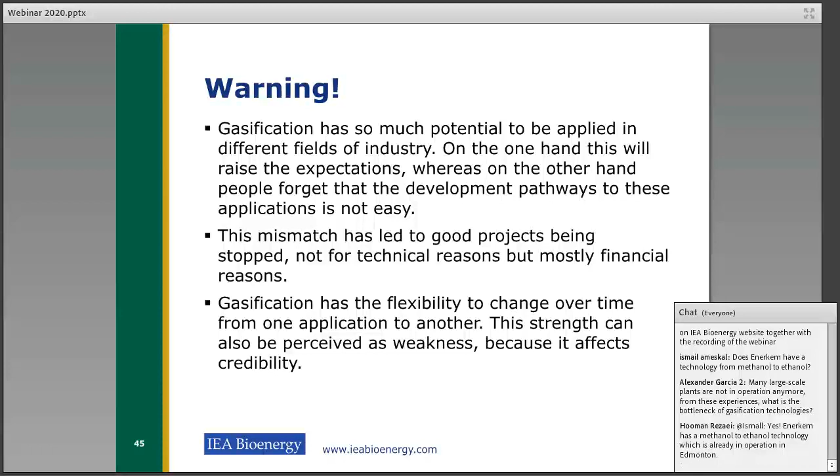So with these warnings, I would like to end, and I think we're over time, and Luc will take it over now.

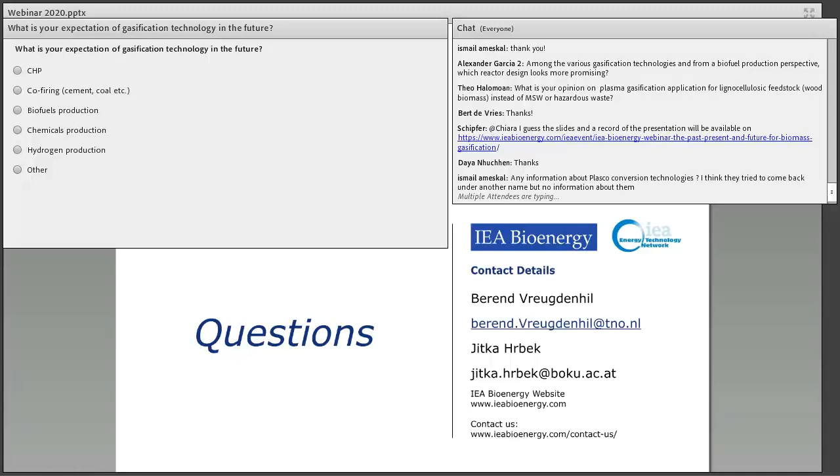Great. A specific question: what about Plasco? They had a technology a few years ago. It's a very specific question. Yeah, I don't know Plasco, sorry.

Here's a question you already answered: many large-scale plants are not in operation anymore, so what's the bottleneck for them? As you said, it's mostly economic, and they're often demos which are expected to run economically, but it's difficult to do that. Yes, I think it's the economical reason, and if you compare the price of biofuels with the price of fossils, they're really not comparable at the moment.

Another question: among the various gasification technologies, from a biofuel production perspective, which reactor design looks more promising? From Alexander Garcia. I think it's not easy to answer this question, it also depends on the feedstock. That would be, if there's a focus on woody biomass, what would be the options versus MSW? Is that the main distinction?